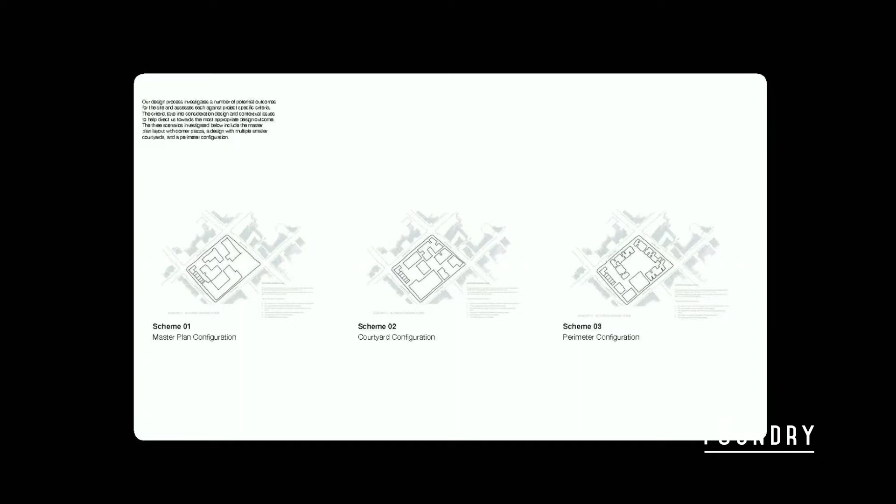This is a project recently where we had 3 different schemes, and so we can actually look at, okay, these are the different options, and then we can weigh them up against design criteria. So this might be what the client's brief was, and it's a really good way of evaluating it to work out which one's the best one that we should be doing, as opposed to just picking the one that we think looks best. So it's quite a rigorous way we work through those. So generally there's a design criteria, then there might be some guiding principles, or you can see contextual issues we had on this one.

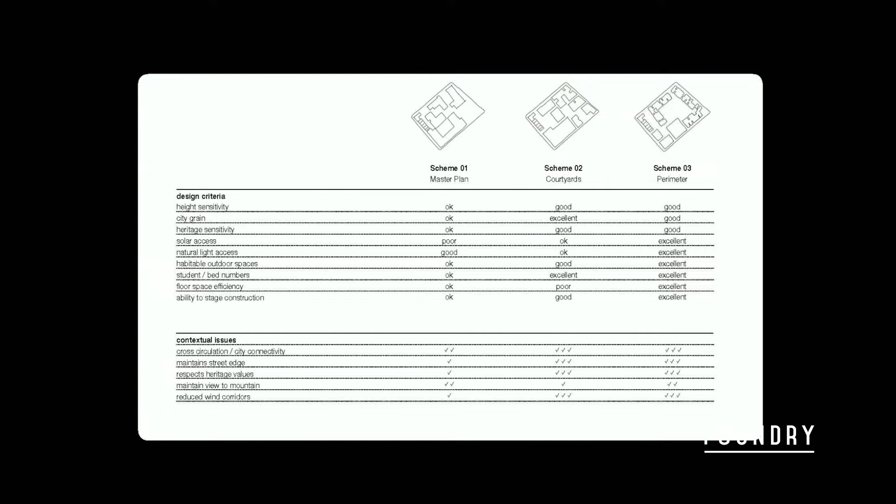So now I thought I'd talk about some projects we've done, and I picked projects that are really linked with the branding. So we had people that had a strong brand, or then we brought in someone to do the branding, and then the architecture and how the two could actually complement each other.

But before I get to those, this is the first ever project we did. We'd started Cumulus, we had no clients, so we thought, how can we get people to be interested in what we're doing? So we went out to the architecture school, got on the laser cutter, and we cut out a whole bunch of these plywood reindeers, and we just sent them to everyone we knew that had been a developer, hotelier, who knows what, and it had a little thing saying Merry Christmas from Cumulus, and every year we've done new ones.

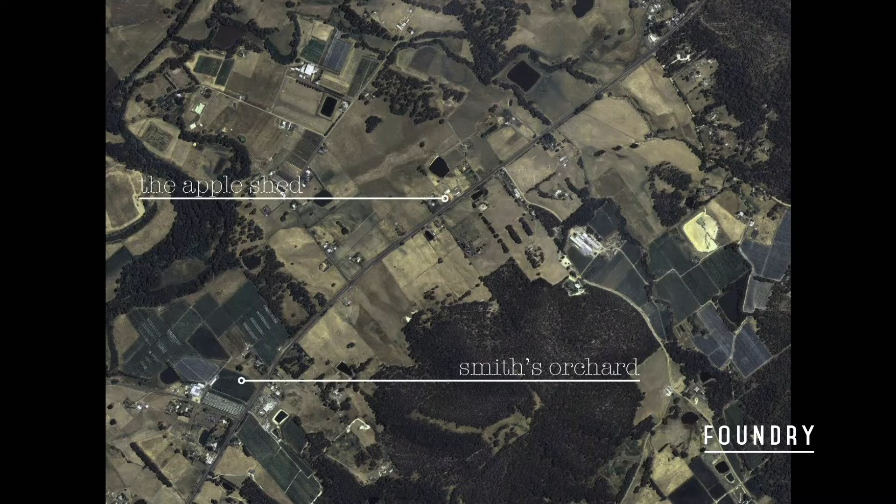They were obviously down the Huon Valley, and they had an existing orchard, so you can see the Smiths orchard there, and then there was an existing apple shed down the road, which was a museum, and the museum wasn't doing very well because it's sort of full of a whole bunch of stuff. So we convinced them that they should approach the guy that owned it and buy it off him and try and turn that into the home of Willie Smiths as opposed to building a new building.

And when we talked to them, we said, what do you have? They had no money. They couldn't afford to pay us, so we got paid in cider. Pete loves cider, I don't, but we have cases and cases of it. So we said, what do you have lots of? And they said, we've got lots of apples. They had lots of apple bins, so crates, apple bins everywhere, lots of pallets, lots of boxes that said Willie Smith on them, and obviously apples, as I said, and lots of recycled timber.

And then they'd bought this space, so this was an existing apple shed down the road. And inside was just full of stuff, so much stuff. It had every single bit of history of the Huon Valley and things about apples and whatever, and you couldn't walk through the space. So we kind of collected up the things that were important and tried to work out how do we put all that together and create a project?

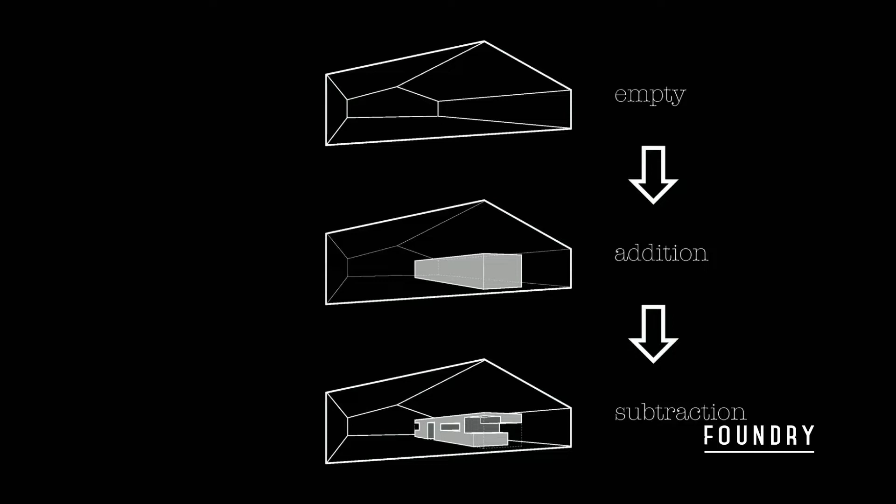The biggest amount of money, I think, was about 30 grand they spent to sandblast the interior because it had this horrible green colour. And then all of a sudden people from the community said, oh, I can come and help. I've got a drill, I've got a saw. And so the whole thing was put together by people that just lived in the community. It's almost become the community centre for the Huon Valley. So we added this addition in the middle and then subtracted parts out of it, and the addition's got a kitchen in it and a bar.

And then the apple boxes we used, so again what they had, free boxes, so we put a whole bunch of boxes on this element that sits in the middle that really sets up the space. And then you look through all of these little elements. We actually worked with Futago in Hobart, so they helped us to kind of clear out as much stuff, bring back as much stuff as we needed, did a full inventory of what was there and made it much clearer to understand the apple story.

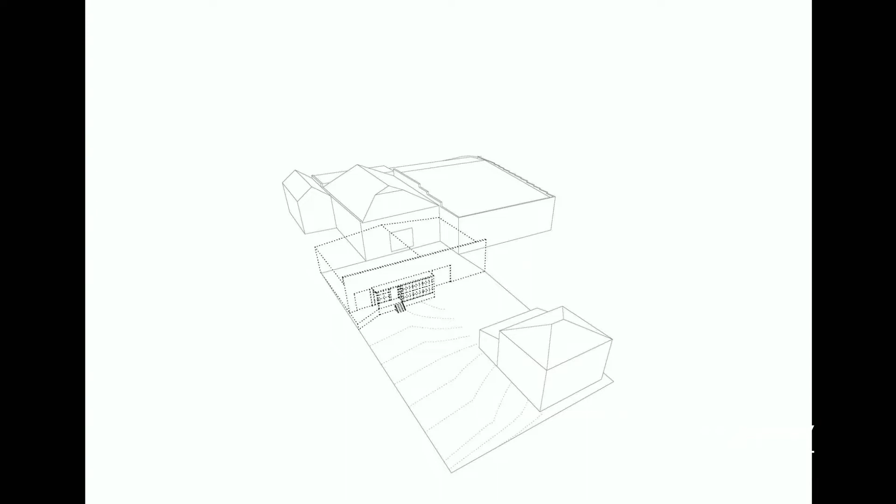And then what we did is we kind of worked out what are all the parts of this building that we can bring together. So there are all the different parts, obviously childcare, they do family support, they want to be part of the community, have an existing warehouse, which was a great space, sort of similar to this, how you can fit things in, and then they do staff training as well. So the kind of approach on this was pull off the front bit of architecture that was probably the worst bit of building stock. So we got rid of that. So we had a nice blank site.

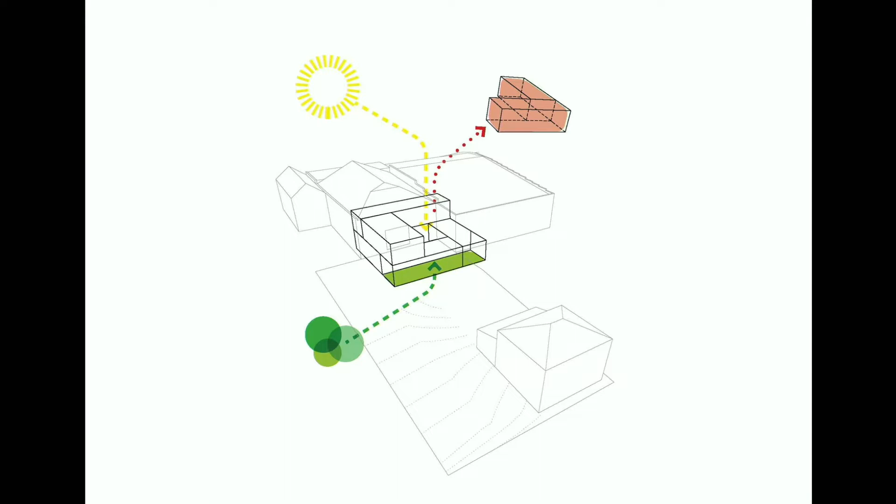Then we added a new element to it, and it's kind of got a building block aesthetic to it where we can actually add some bits and subtract them. So we subtracted bits out to get sun in, create some outdoor spaces for the inhabitants, the kids to play in. So obviously it's quite urban, there's not really any outdoor space.

Then we put a new entry into this building, and really the most complicated bit was all the ramps. So, the levels. So we got stairs, nearly everything was like a half level. So it actually created a really great architectural space because you could see into a series of different spaces, but it became quite complicated in terms of how you move between those spaces. So this is what it was like. This is now what it's like.

And again, we worked with Futago, and they came in and did this beautiful branding exercise about how do we bring people through and tie the entire project together. So this is a beautiful gate at the front they made, quite playful, turns into a bit of sign writing on the ground that runs right down to the main street. It's someone in our office's child, I think.

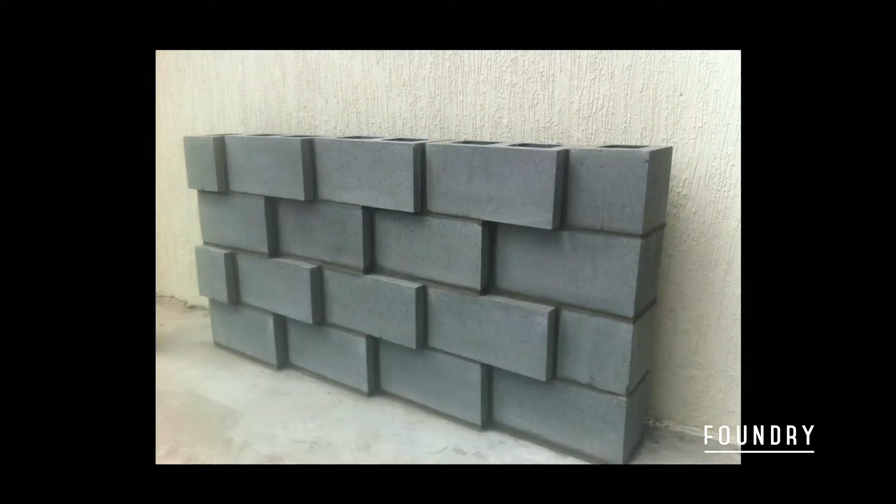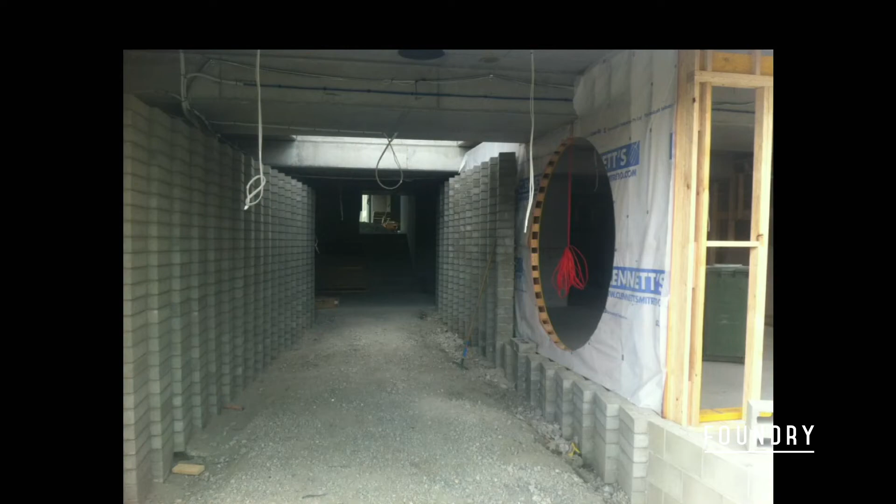And then we worked with Jude Abel in Hobart, she actually did her architecture degree at the same time Pete and I were doing it, and now she does lots of art installations and works on public art projects. So she worked with us in the front entry. We laid a whole bunch of block work. How could we do something simple with block work, and laid that through the front entry. And then it got mirrors applied to it. So it's got this beautiful, playful entry.

You can see the handrail, the front fence becomes a handrail that actually draws people into the building. And then that runs right through. So the whole building has this kind of branding that runs through with a yellow handrail that becomes part of the whole space. And that's the interior space.

So again, we had no outdoor space, so we ended up with a huge warehouse, double height space. We chopped out a floor, put a Laserlite roof on so that you could actually get light into this space and make it feel outdoors, but it's actually an indoor space. So that's the outdoor space at the front. You can see up to Mount Wellington, see through the screen. So obviously all the children there are quite safe. They can't fall out of this space, but they can see down to the road and see the city beyond.

So the next one is, I'm sure everyone's seen this, but Devil's Corner. Again, they had a really great brand and a great product, but they had a terrible cellar door just because that was sort of all they had at the time. The branding, obviously, you can see on there is beautifully done. They just wrapped this building and they came to us and said, how can we make it something better than what it is? Their original brief to us, we want a viewing deck so people stop.

So I'm talking like a deck I'm standing on so you can look across to the Hazards. Again, we said, what do you have? And they said lots of containers. Obviously, they had a beautiful view. And so all these things went in to kind of start this project. And it was really 4 simple ideas. The first one was a stop sign. How do you get people to stop and come into the winery?

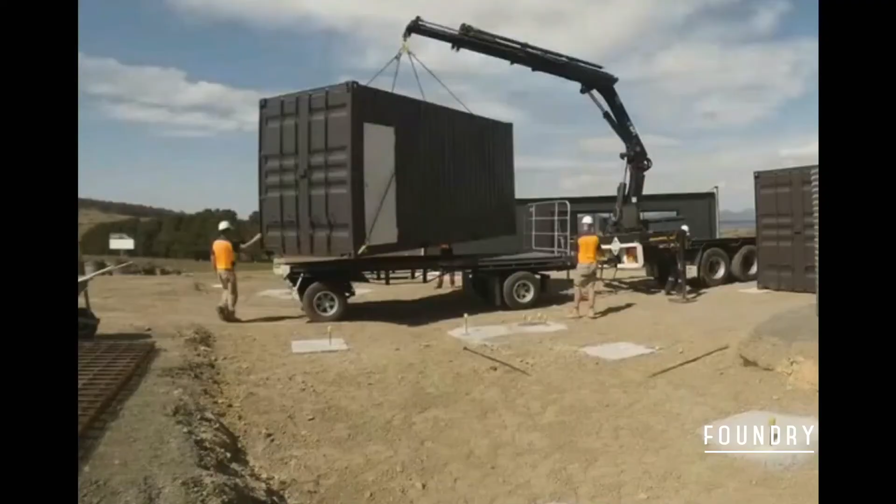So we actually made it a demountable building. It was portable and taken to site and lifted on site by the builders. So it went up quite quickly. So they put all the containers together, lifted it up into place, and then clad it with the timber cladding.

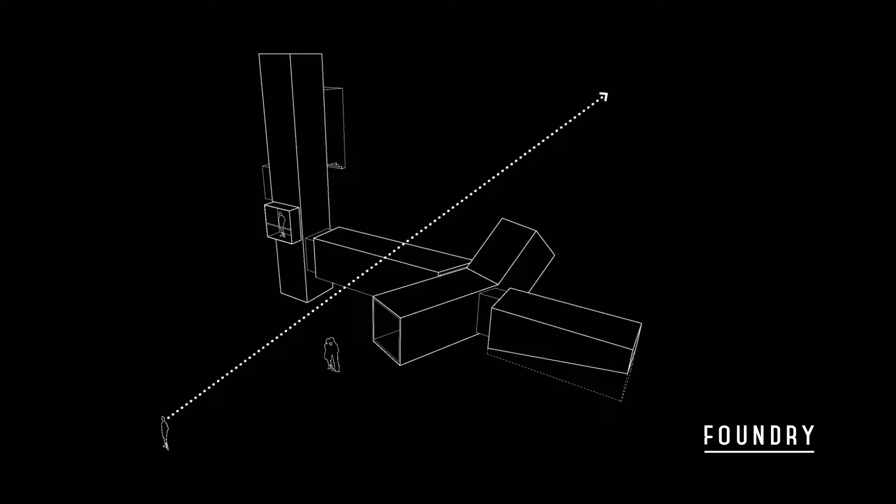The third part of it was this idea about how all wines are different. So how do you bring the different wine experiences and tasting wine and drinking wine into the building? So we looked at that in the sense of how do we create these different views of the building. So the first view you have is that Hazards view is almost blocked. So you get to the building and you can't actually see the Hazards.

Then the next one was about this kind of cranked container, which was all about a sky view. So what we found was a lot of the international tourists that came to Tasmania couldn't believe how beautifully blue our sky was. So as you walk into this space, obviously it's an overcast day, but it takes away everything else and you just see that blue sky or the beautiful white clouds. And we have lots of people that try and run up the ramp and get out the end, as you can see.

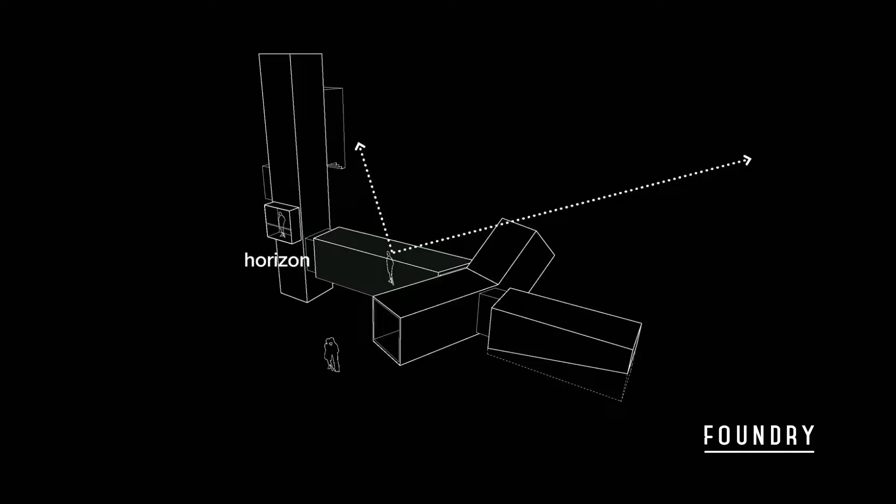The other one was about the horizon view. So then as you move from space to space, you end up with this horizon view looking out over the Hazards. And again, it's quite a different space to the previous one you're in. And then the tower has a series of views out of it where you're looking northeast, southwest. So again, looking at different parts of the winery and the surroundings. The cage was put on.

One of the things I should probably mention is architecture is really complicated and really litigious. So we have lots of building surveyors, lots of people telling us what we can and can't do. They told us we needed to put this metal screen because people might try and jump out of the thing. It's now gone. We managed to win that battle, but that had to go in at the start of the project. But I think it's an interesting one how a lot of what we do is design, but a lot of it is how do we solve all those difficult things.

Probably the most difficult one's gravity, so obviously we need to make buildings that stand up. But standards, building codes are a really complicated part of what we do. So that's the view from the top, which now the mesh screen's gone.

And the fourth idea was this idea of the client didn't want to build a cellar door. They said, look, we're great at making wine. We're not great at employing a whole bunch of staff. We don't want to have a kitchen. So we came up with this idea of how do we set it up as almost a mini village that could grow. And then you let other people come and run things there.

So they put in 2 commercial spaces, went out and said who'd be interested. There was a seafood place and a pizza. Tombolo said, yeah, we'll have one. So these guys come, they just cook pizzas, they just make fish and chips. Devil's Corner make the wine, and the whole thing works quite well.

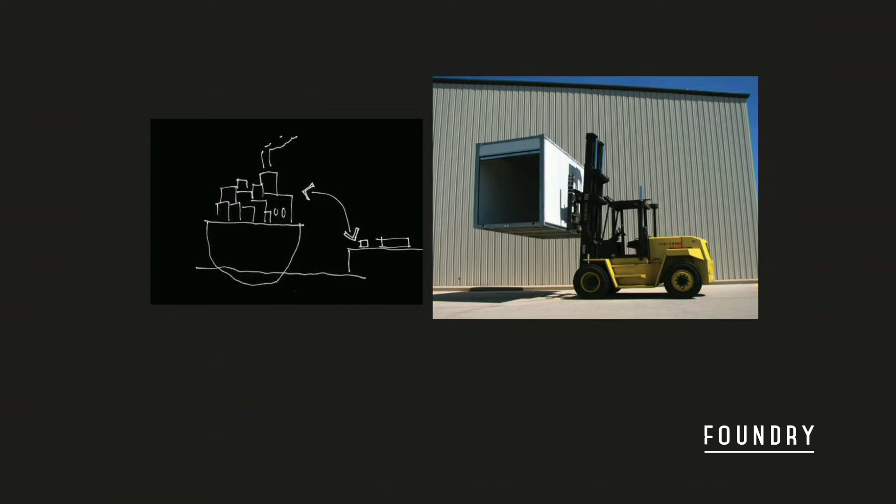And it had to be, again, transportable, so we were told quite clearly we can only use containers, which we'd done before many times. And the interesting thing is they set up these cruise port shelters within 40 minutes, and they take them down within about 10 minutes of people getting off the boat, because that cruise ship goes and then the next one's coming in, which might be a container ship or a wood chip ship. So they had to be really quite flexible.

So they had to have 2 containers to fit the people in. As I said, you got 40 minutes, so you put 2 containers down. Then we had to put some sort of joining thing between the containers, almost an umbrella. And so then we thought, how can we make that something really interesting? So that becomes a branding exercise on the side of it. Again, we work with Futago, and it was all about welcome to Tasmania. How do we make people feel welcome in Tasmania as they get off?

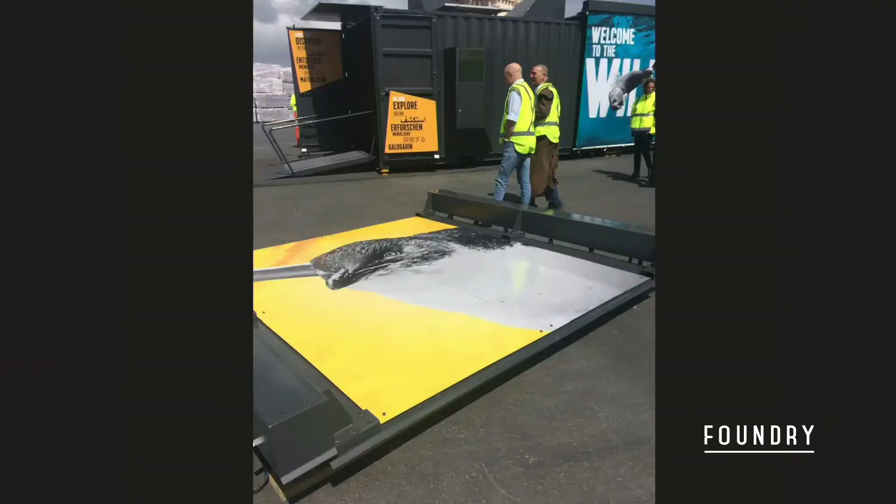So we had these huge hoods made that had to be lifted on by a forklift, so everything was quite strict in how they went together. So one person can put the containers down, put the lid over the top, and bring the blinds down. This is just a plan if anyone's interested, but they're really quite small. They've got a couple of seats inside, a perching bench and a couple of windows.

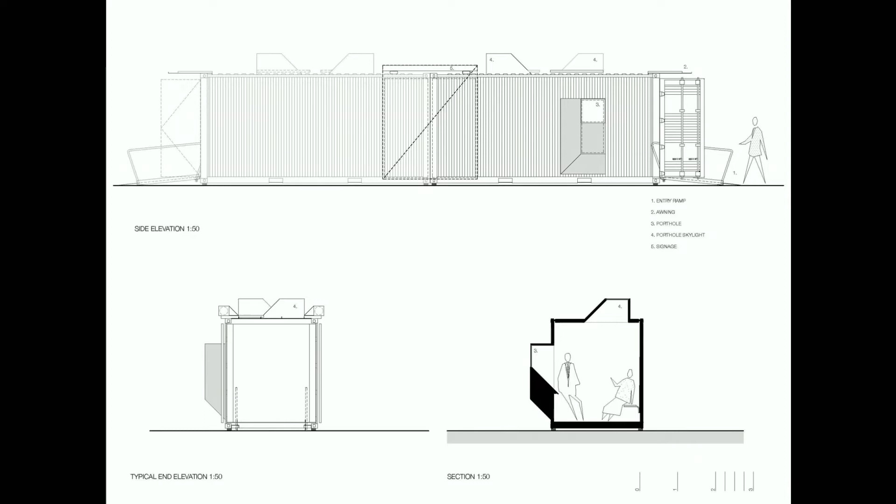So you can see down in the bottom section, there's sort of a spot where people can sit on their mobile phone, because we find people don't tend to sit on seats anymore. They like to lean on the edge of something. And then the next part of it was about material and experience. So we didn't shy away from the fact that there is a huge wood chip pile next to you. And we made that part of the experience as people come in.

So all the interiors are OSB, which is a pretty commonly used, cheap, robust product. We then had portholes in it to get these views of the huge bits of... we had, as I said, lots of big bits of machinery around that was really interesting. So how do we then pick views where you only see those bits of equipment? And we came up with this idea of a whole series of quite sculptural windows on the outside of the building that then picked up the views around the ports.

At the last minute, Burnie City Council came in and said, seeing as we're putting money in, we want to put heaps of our branding all over these things. And they got pretty terrible branding. I hope no one did it here. So that presented a bit of a challenge, and what we did is all the glass we used in the buildings, we said, we're going to use all your colours and we're going to put it on the glass. So it actually makes the space quite beautiful, but it was a good way to not cover it in branding as you're walking through there.

So when you get to the port from the ship, that's what you see. So we've got these Welcome to the Wild. There's a whole bunch of different branding exercises on the side, but Tasmanian devils, platypuses, etc. Because you are quite high, sort of 6 to 10 stories above the water when you get off, and people walk down and walk through these structures. We kind of think of them like witches' hats, where we just guide people through to something, but they stand in them, there's brochures, etc., and they get on the bus.

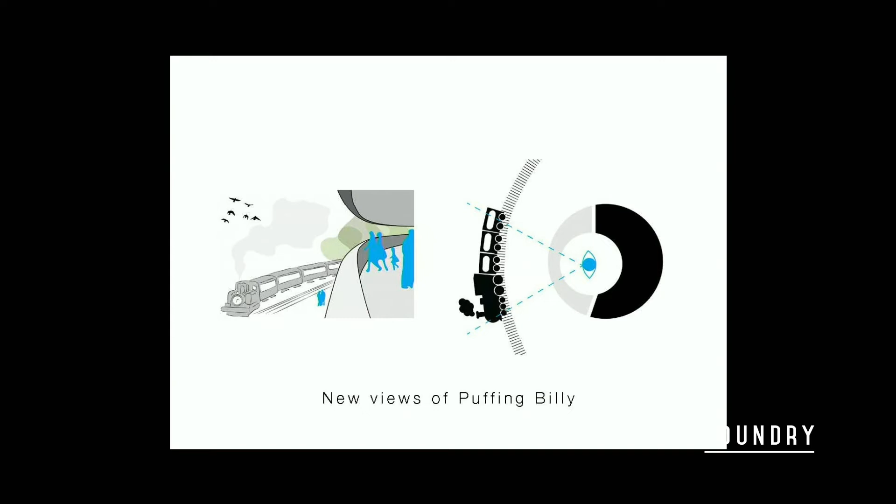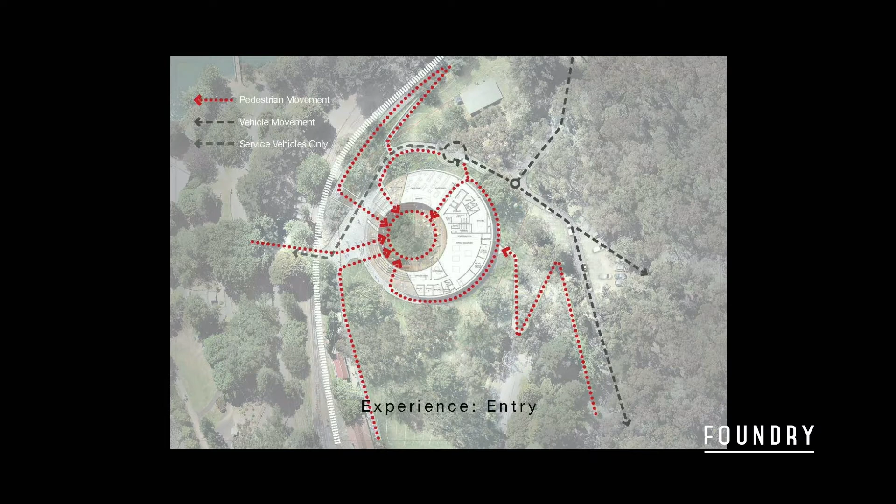So when you're in the building, you see Puffing Billy go past. The whole thing was about how do you get this beautiful view of the train. And this is sort of movement through the site. So we had a whole bunch of ways pedestrians moved through, vehicles to deal with, service vehicles that we didn't want to see. And then the whole building had a big courtyard space in the middle.

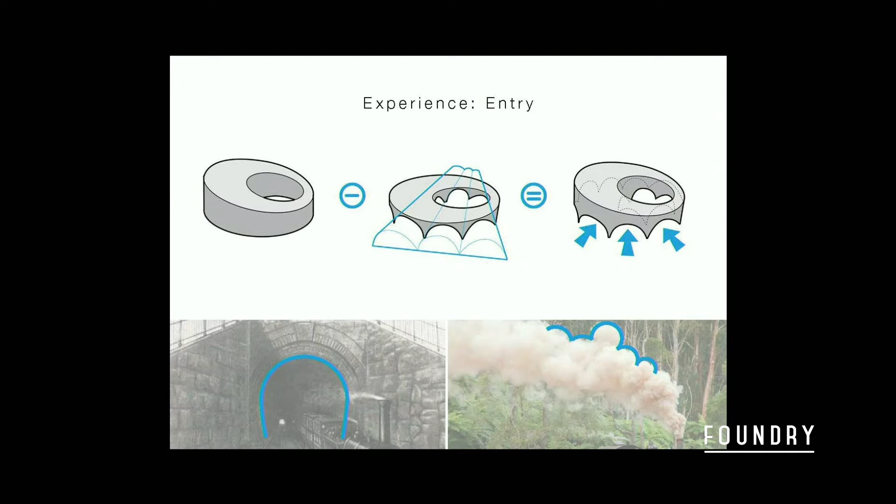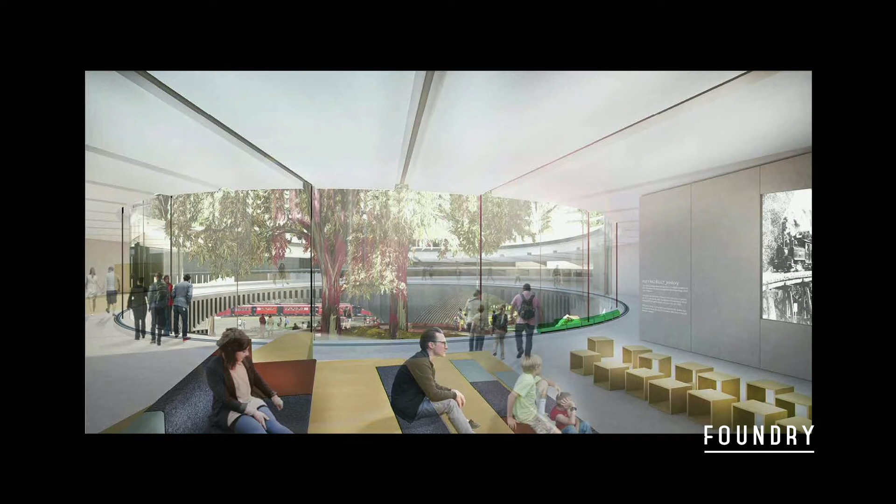This is sort of cruising along into the building along a covered way. And then this experience of entry. So we took cues from trains and train tunnels and opened up a whole series of arches into this courtyard space. And then the whole building had a sense like the train going across the bridge. And inside it all looks into this central courtyard and then the train beyond, but all the spaces are interconnected so you can view through them.

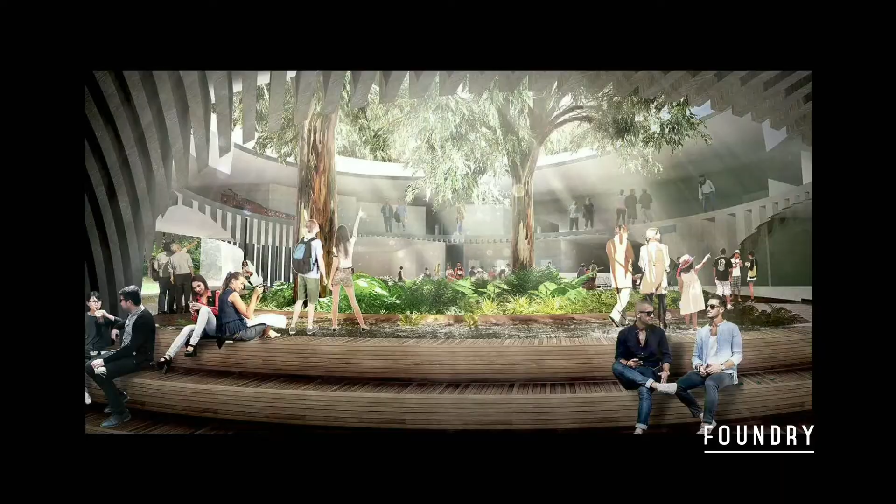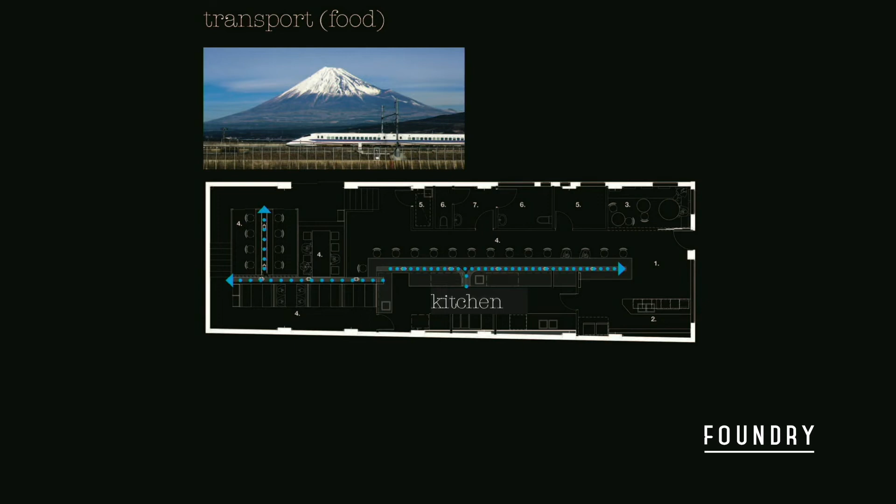And the strategy for this one was, it's kind of like a high-speed sushi train, but it was interesting because he said, I've already bought the train and I've already bought all the bits, so we had to work out how we're going to fit it in the space. He didn't kind of work out the space and then work out the bits. So it was quite a bit like a Meccano set, and we had to organise the spaces around it. So obviously it had a whole series of bits. We had transport food, so the food comes out quite quickly. It had to come from a central kitchen space.

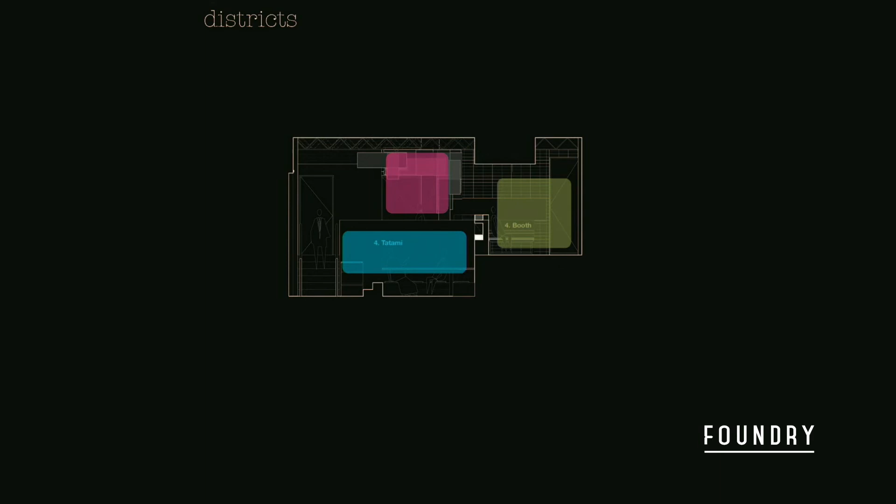And in order to make it feel quite intimate, we broke it up into little districts and based it on, obviously, Japan. So those districts run along. We've got sort of a step down at the back of the building we had to deal with, and you can see through a series of spaces. So it's really quite a nice way to think about the building in terms of how you can see into different spaces of it. So the first district was all about cherry blossoms. It feels quite fresh and spring-like.

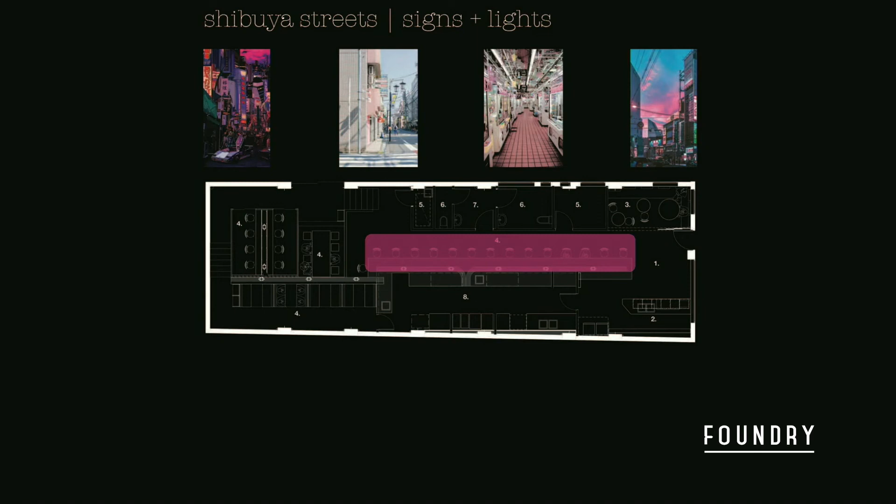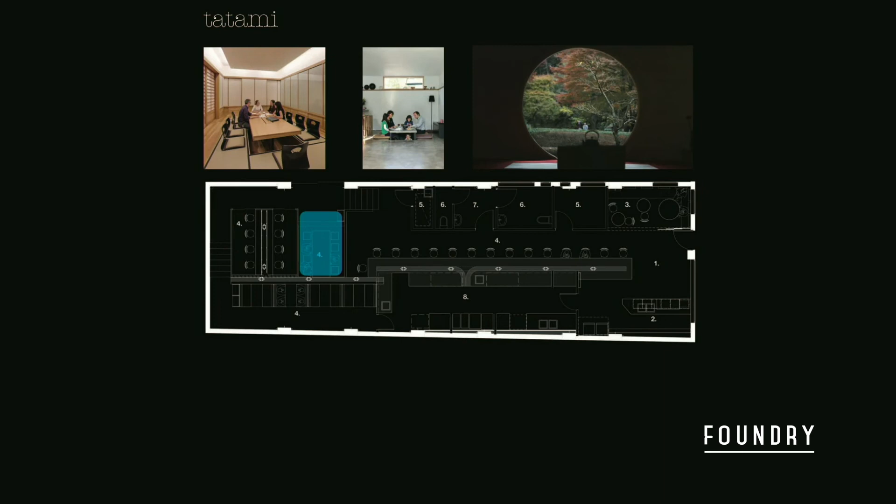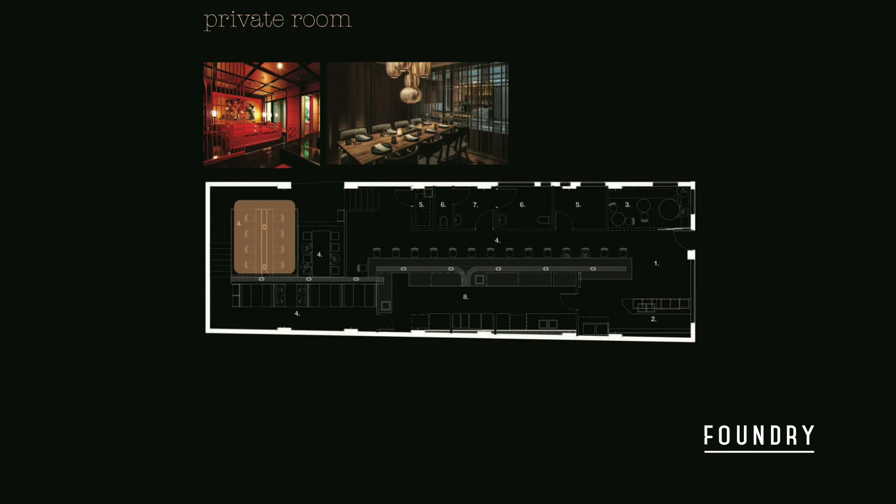And then the next one was sort of Shibuya street signs and lights. When you're in that space, it feels quite different as well. It's all one big linear space that you walk through. Then the third space was a tatami room. So this is a room where you might do private dining. The moon gate we obviously couldn't do, so there's a digital moon gate kind of on the wall there that looks like the trees are all moving. It's quite beautiful. Then there's a private room at the end which can be closed off obviously and can be serviced from the sushi train.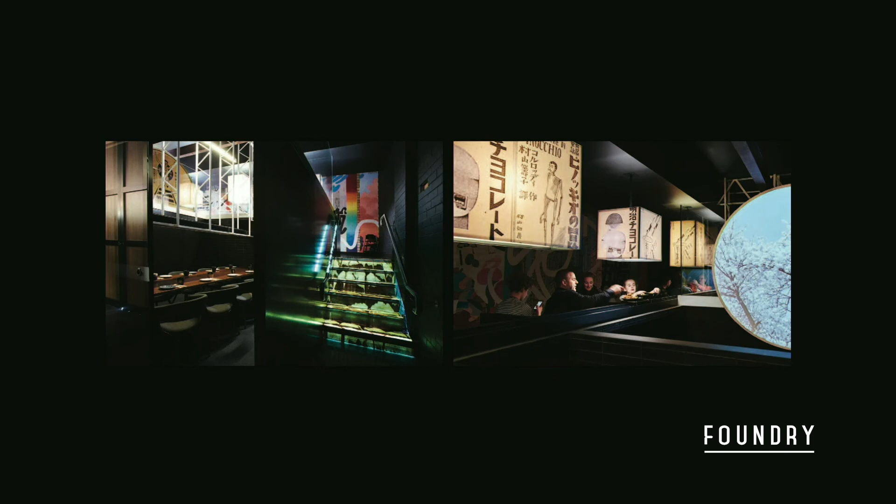That's the private room. And then up the back there's kind of this Kyoto lantern traditional type space which feels quite grungy and rustic, and there's a whole bunch of different branding and graphic exercises. I can't remember the artist. I think it might have been Daisy Legs did that for us. So this space is again this sort of intimate space, but you can look down into the other spaces from there.

That's my family who get to model in lots of photos.